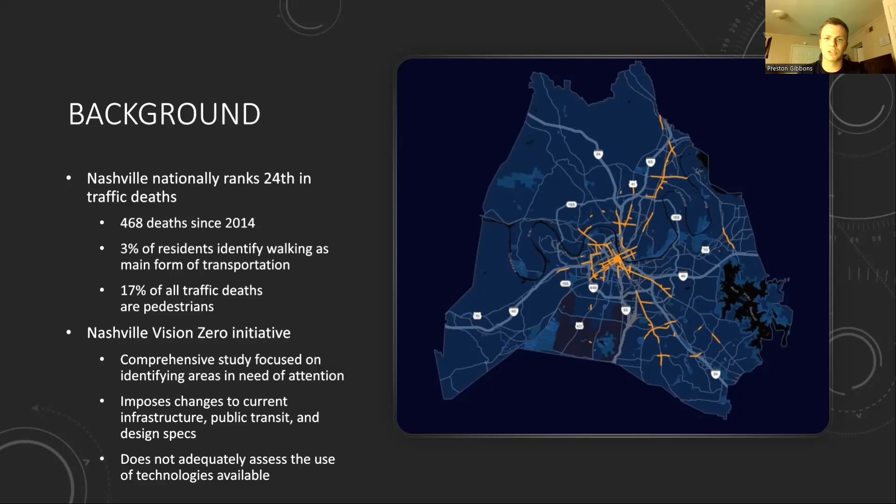It was a study focused on identifying areas that are in need of attention, and it aims to impose changes to current infrastructure, public transit, and design specifications of those problem areas. However, our group feels that it does not adequately assess the use of technologies available that can be used to mitigate the issue, and that is what we are presenting on today.

Okay, so to analyze the problem and come up with innovative solutions, we researched both technologies and methods to implement in Nashville to reduce hit and run incidences. The first being pedestrian scale lighting. This is intended to create an environment at nighttime where drivers can quickly and accurately identify pedestrians on sidewalks and crossways. There's two styles, the first being LED light poles, and as you can see on the upper left picture, that's the light poles, and the bottom left picture is LED crosswalk strips.

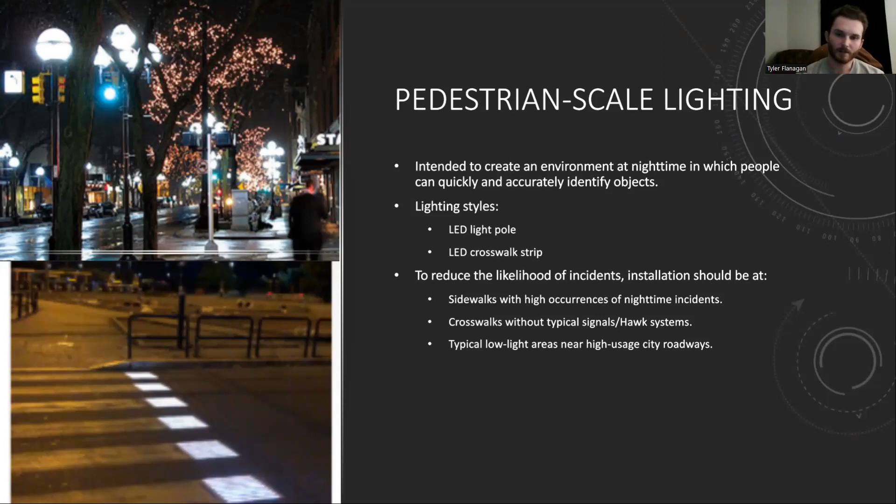These are generally installed in or near sidewalks with high occurrences of nighttime incidences, and crosswalks where there aren't the typical signals or HAWK systems implemented, also in typical low light areas where high usage city roadways are placed.

To analyze the first of those, the LED light poles, a study by Frank Markowitz indicated that about 2/3 of the pedestrian fatalities in the U.S. occur at night or during low light conditions. Therefore, it would be beneficial to put pedestrian scale fixtures up. These are to improve the visibility of pedestrians as they walk across or on sidewalks. They're generally directed straight towards the sidewalks.

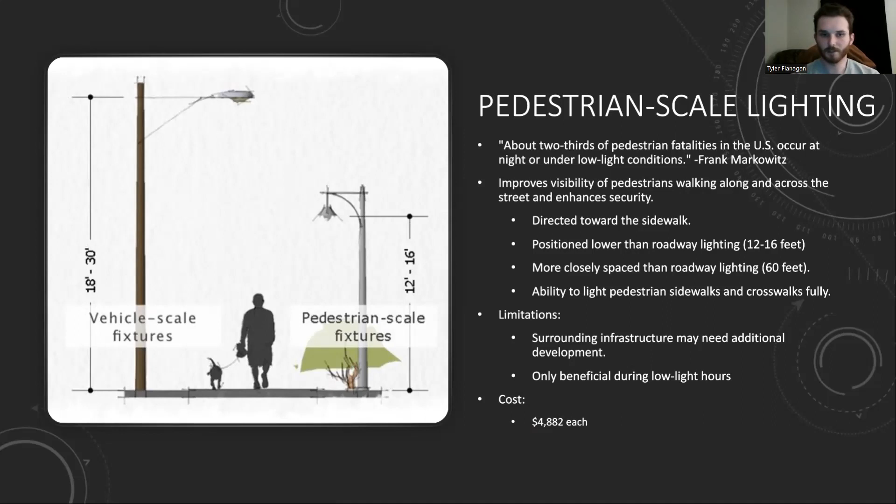They're positioned lower than the typical light fixture on roadways at 12 to 16 feet, and they're spaced closer at only 60 feet in between each light fixture. This gives an ability to light both sidewalks and crosswalks fully. The only limitations with this are obviously it'll only be beneficial in low light hours, and the surrounding infrastructure may need additional development to keep up with the capacity of energy that'll be needed. And the cost to install one light fixture is around $4,882 a piece.

The second solution, again, being the LED light strips. A research article done by Sergio Patella indicated that a car's mean average speed decreases by 19.3% when they approach a crosswalk that's illuminated with these light strips. They're used to enhance the ability for drivers to identify pedestrians as they walk across these crosswalks. They're generally installed directly into the crosswalk pavement and positioned to shine directly on the pedestrian.

As you can see on the picture on the top left, without the lights, it's kind of just a dark figure walking across the crosswalk. And when the lights are installed, you can vividly see a pedestrian as they walk across. Again, these are only beneficial during low light hours, and it doesn't protect pedestrians against their own neglect from walking across the streets without paying attention to the area. They generally cost around $2,500 a piece, though.

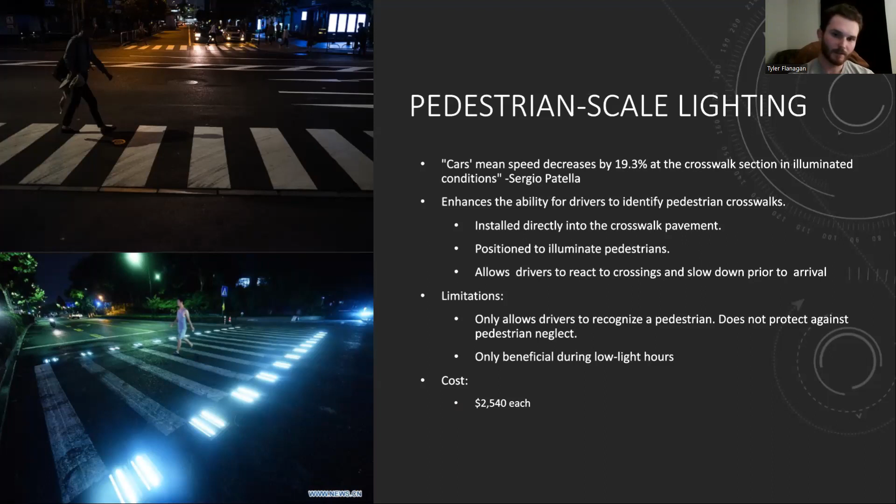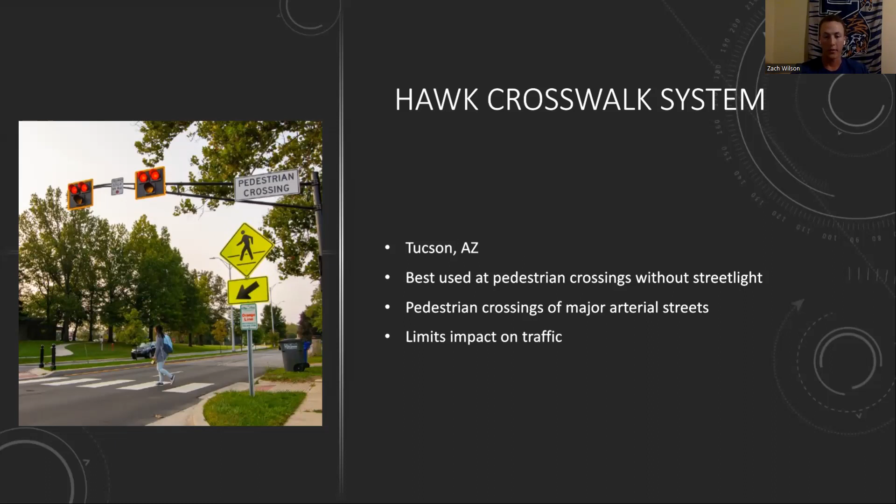So another solution is the HAWK crosswalk system. These were developed by the city of Tucson, Arizona, and they're best to be used at pedestrian crossings that don't have a traffic signal in place. The goal of these is to allow pedestrians to cross major streets while limiting the impact on traffic as much as possible.

And this slide will kind of go into how this works. So the HAWK looks similar to a traffic signal, except the lights begin dark whenever there's no pedestrians there. As soon as a pedestrian wants to cross the street, they'll press a button and this will activate a flashing yellow signal. This will allow drivers to know that somebody's trying to cross the street. It'll then go to a solid yellow and a solid red. At the solid red, the drivers should be stopped and the pedestrians are free to cross the intersection.

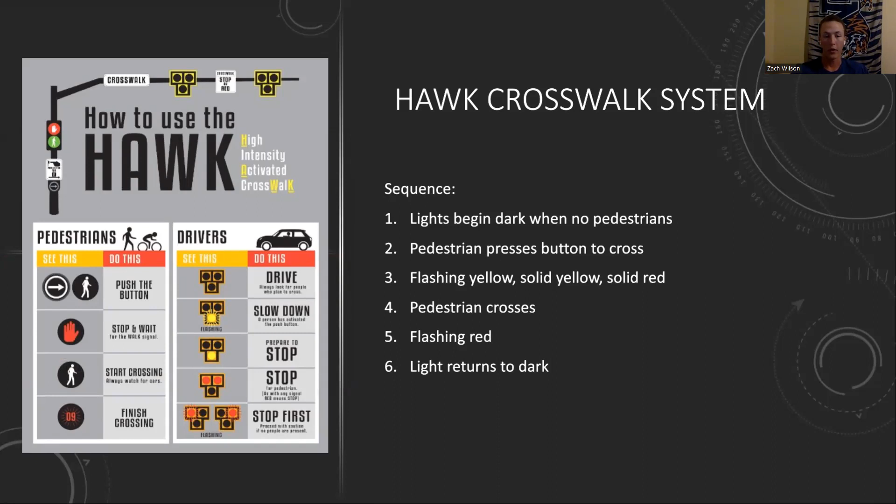After a certain amount of time, this switches over to a flashing red. So the drivers can approach the intersection, and if they see that the pedestrians have already crossed their lane of traffic, they're free to continue. And eventually the light will return back to dark and drivers can drive through like normal.

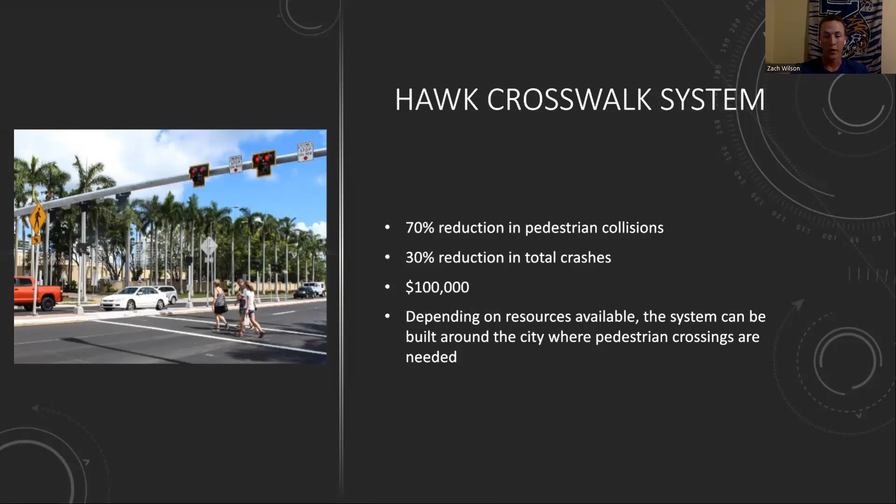And so studies show that there's been a 70% reduction in pedestrian collisions and a 30% reduction in total crashes where the system's used. And each one of these are $100,000. So depending on the resources that are available, they can be built around the city wherever pedestrian crossings are needed.

Another technology that can help solve this problem is connected vehicle technology. This is an intermodal data collection and communication technology that can be installed in vehicles or infrastructure. And it provides an immense amount of data that a vehicle can use to automatically assess risk and mitigate collisions. And there are three different types of connected vehicle technology: vehicle to vehicle, vehicle to infrastructure, and vehicle to pedestrian.

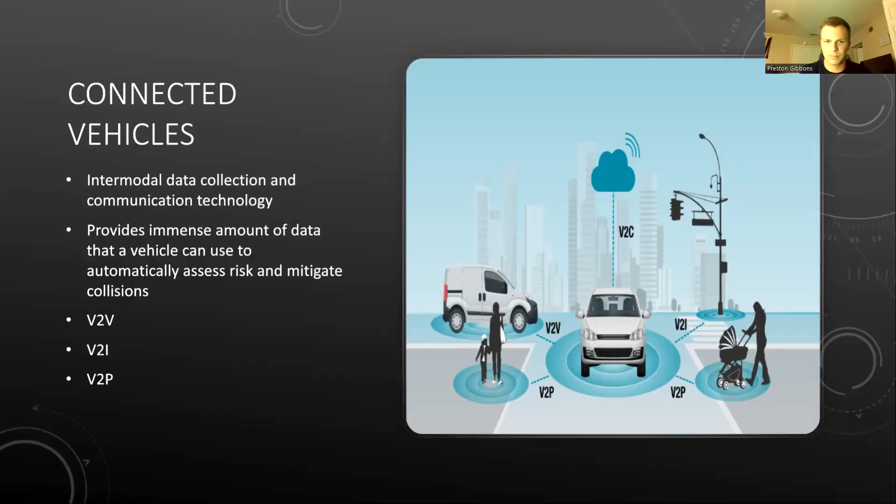So as a whole, it is estimated that connected vehicles can prevent 80% of all vehicle incidents. And they do this by using LiDAR or radar sensors that can detect, classify, and communicate data to vehicles or pedestrians. And it improves the ability for a driver or a vehicle to react in a timely manner by outsourcing the data collection part of detecting objects in the roadway. And in turn, it enhances onboard vehicle safety features such as lane assist or collision detection and automatic braking.

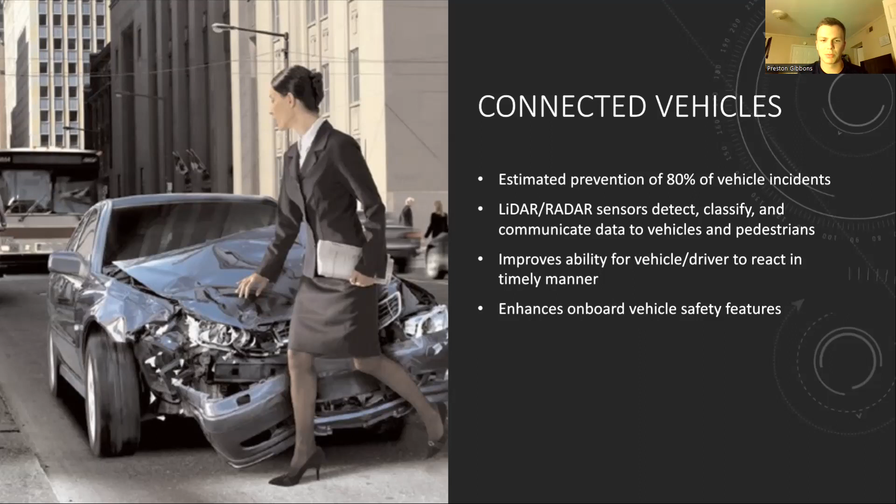So there are a few stakeholders when it comes to connected vehicles. The first is the obvious one, which is transportation departments. And they're really concerned about the operation, management, and oversight of the systems themselves. And secondly, we have the user, which is broken down into motorists and pedestrians. And they want this technology to be easy to use. They want it to be effective to where they feel that it serves to protect them.

And the last is the automotive manufacturers. Obviously, they're the ones creating the cars. So they care about the standardization of systems that collect data and communicate data, so this technology can be used wherever the vehicle ends up.

When it comes to cost, this is a relatively inexpensive solution. On average, it costs about $17,600 to install in an intersection or a problem area where it is deemed that these sensors need to be placed. So this is a very viable solution to our issue.

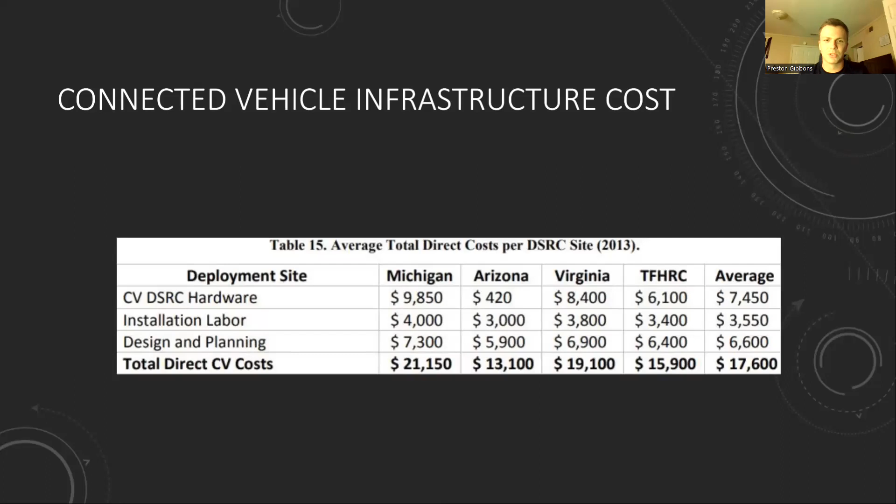And from the safety consideration, I'll talk about 2 points. The first one, transit stops and sidewalk. First, the location and design of transit stops can significantly impact the safety for the pedestrian. For example, buses should stop where pedestrians frequently transfer between different bus routes, and it should be located on the same side of the intersection.